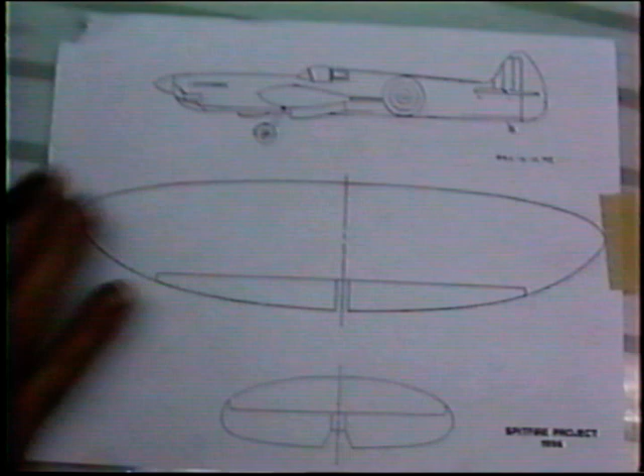Well, actually, no matter what model you're making, it's always a good idea to start off with these little shrunk-down 3 views here. Joe, of course, made these. In fact, I think he even has the revised ones. Okay, so what Joe and I have both done in the past is make up several sketches of tentative paint jobs. But what we also want to do is take out a sheet of paper and put together a schedule.

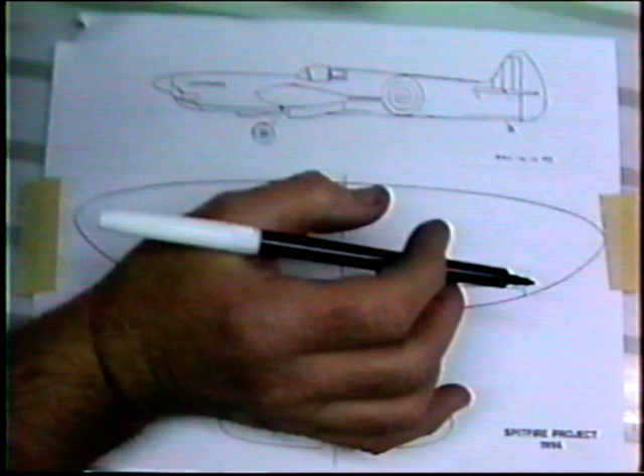Now the purpose of a schedule, and I'll keep this off camera, is you go through a little mock-up of the paint job. And it doesn't matter if this is a Cardinal or who knows what. I would say you always want to start with the lightest colors first. In this case, we know the invasion stripes are going to be black and white, and I'm just going to sketch these in tentatively here. So I have a white one, this would be a black one. This is not to make a pretty picture, this is just to go through the scheduling.

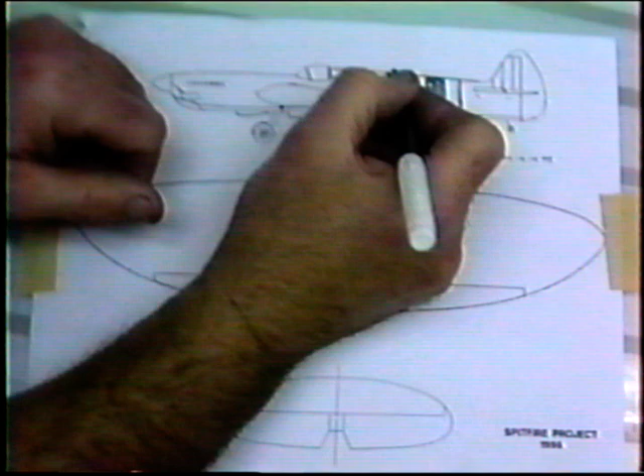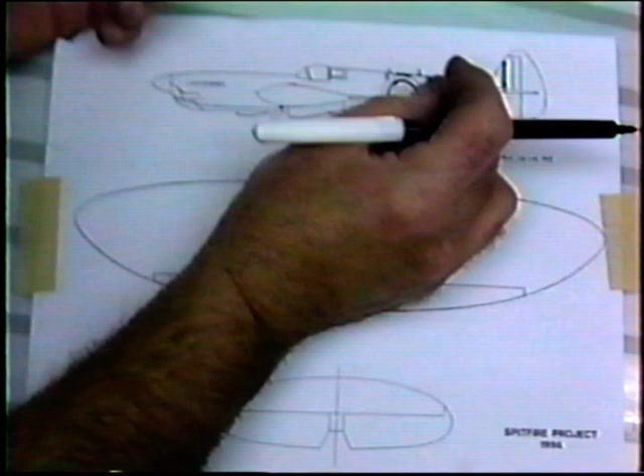Now the white, I would have this white, and this white, and this part of the roundel would be white. So I also would have a bar back here of white. It's always easiest to do the lightest color first. You wouldn't want to paint the black stripe and paint the white on top. And I really wouldn't want to backmask for that amount of distance. We're only going to have 1 or maybe 1.5 of the invasion stripes black, so it almost doesn't pay to backmask it. So step 1, and I'll bring out the little schedule, is the white bands.

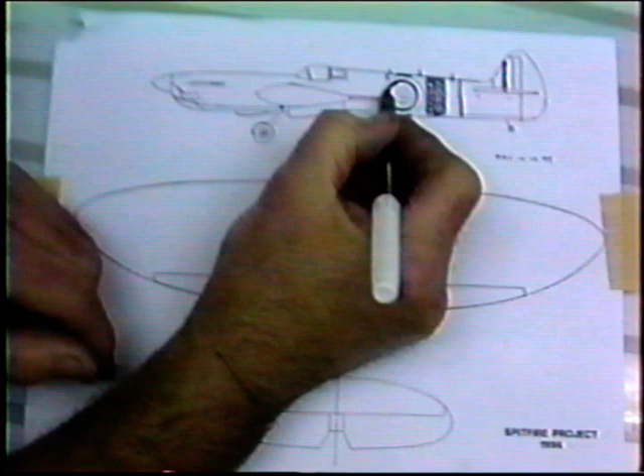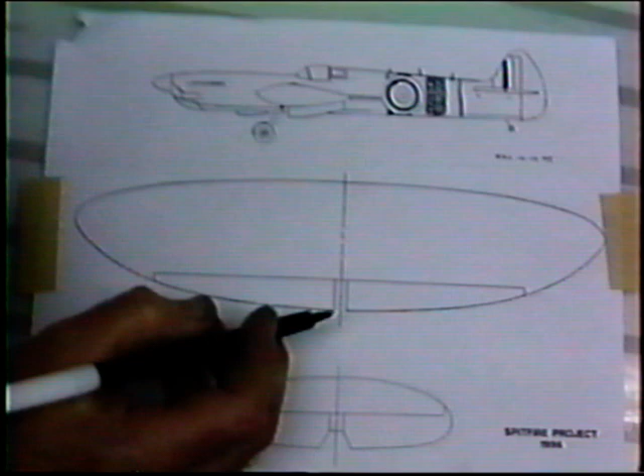Now in this case, the white bands also let me pick this up at the same time. So when I mask this off, I'll really be masking the roundel and that stripe all in one shot. I'll also have to backmask or mask this little stripe here. So again, once I have white in the gun, I'd like to paint the white, and because it's the lightest color, I'd like to get that done first. Now I also have to lay out, with patterns, a barber pole here: white, black, white, black.

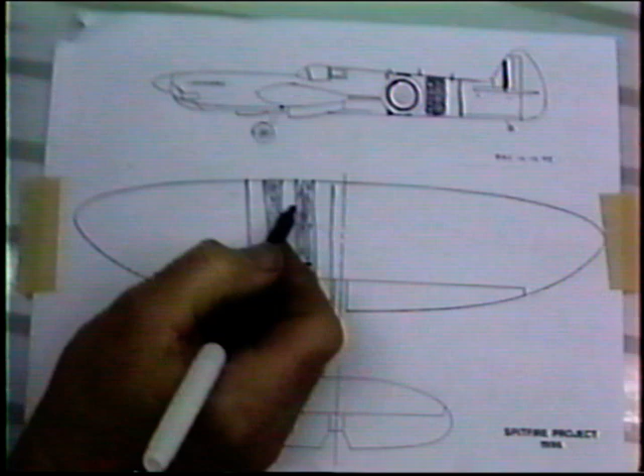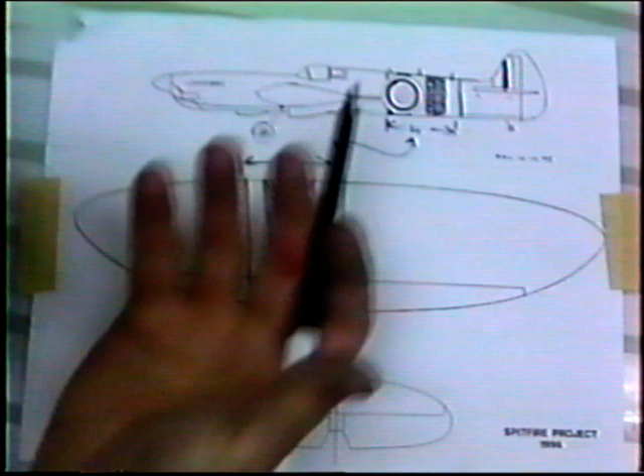Okay, the invasion stripes. Right from the onset I knew I wanted invasion stripes. So looking at this I can see I want to paint this whole band white. So I'll paint this band and this band white. Now there's a couple of things for figuring this out. If I was to paint the whole plane the camouflage color and then paint this white and then black, I'm going to have paint on top of paint on top of paint. I'm really struggling to keep the finish as light as possible. These bands are probably the one exception to the rule. The one part of the plane that will have more than one coat of paint is going to be the black in the invasion stripes.

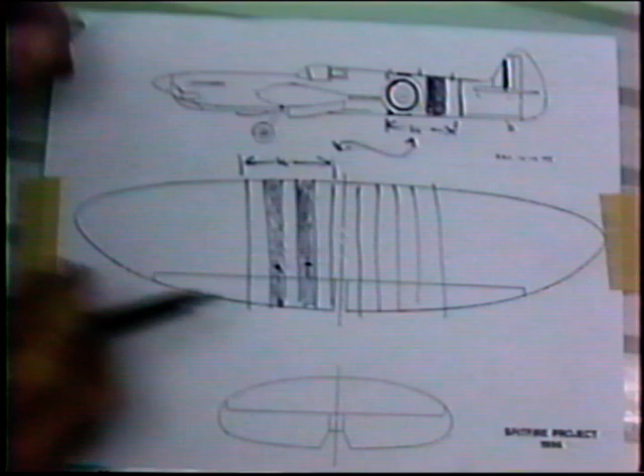But anyway, these will be on the bottom too. So there's no point in even fooling around here. If I know ahead of time, I have a band, and a band, and a little piece to paint. And of course the radiators, wherever they wind up being on the bottom. The point is, figure out what you want to do first. So the first thing in the schedule is the white bands. That's going to be the first thing we do when we actually go to the plane: get the white bands painted.

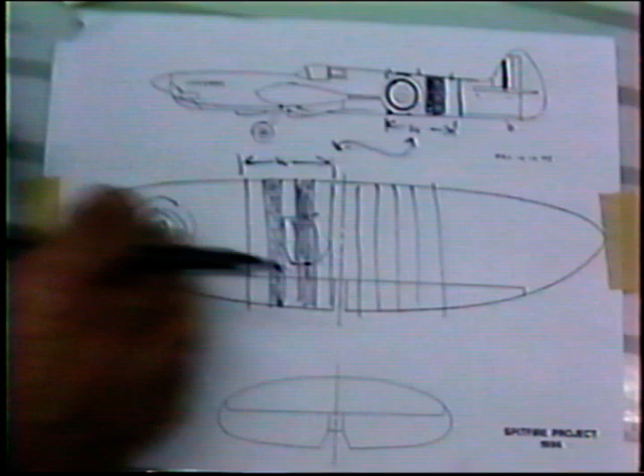We're going to mask off the white bands, estimate how far out they go. On the bottom, I've got to check this out, the roundels on the bottom have a white spot. We'll have to see if we're going to try to backmask that at the same time. But again, if we do it up here, the object is the colors. I want to paint the white first, if possible. That also lets me bring the white over the silver, which gives the best coverage.

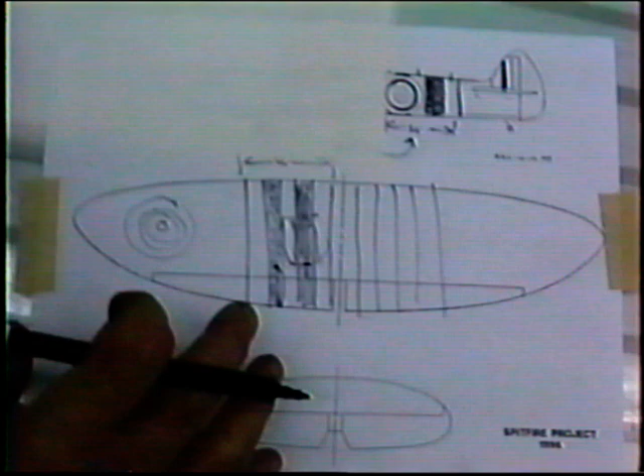So the second thing on my schedule is the black bands. That should cover real easy, the black will be the second color. Now the idea of doing this is to take a little dry run through the paint job and see. Because you never know when you're all finished, oh geez, if I just would have backmasked that, I could have done that, I could have done this. It's always easy to pretend you're painting a plane. Go through a little dry run on this.

I've done this so many times with Cardinals, and I know Midgley has done it, and I know Adamusco's done it. Figure this all out ahead of time. Walt Russell in Washington used to be real good at making up little sketches of his paint job before he ever went out and did it.

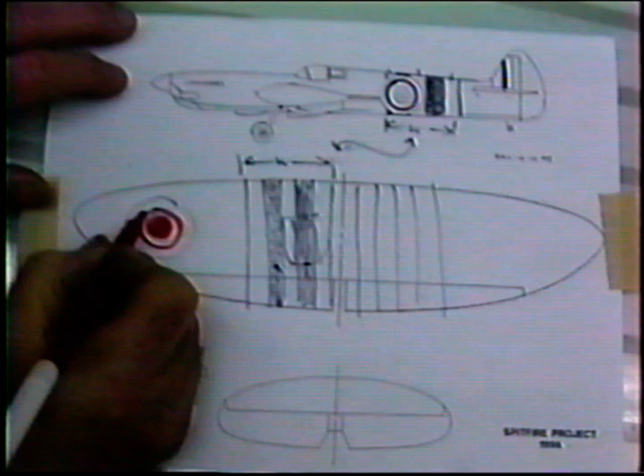Now what we may want to do, on the bottom roundels, the center is red. I may want to make the red, and I don't know this yet, I'm still doing my dry run. On the top they're red and blue, but on the bottom there's a band of white. So what I may want to do is paint this whole circle white, and then just paint the red on top of it. Again, I'm going to think about this. I know I need a little red up here. If I remember right, the red is on. I'll have to check the colors. Believe me, what I'm doing is just trying to make a little dry run here.

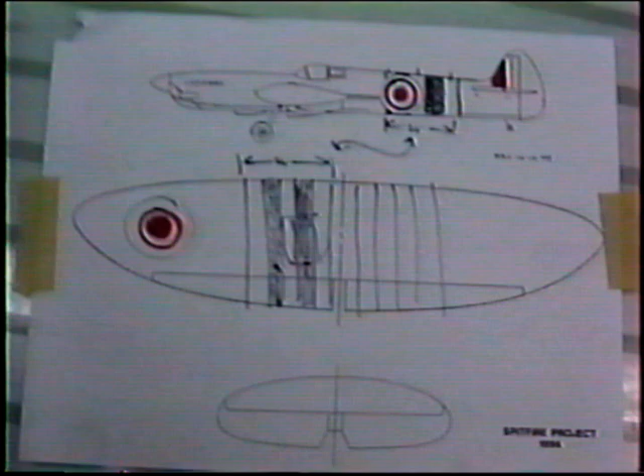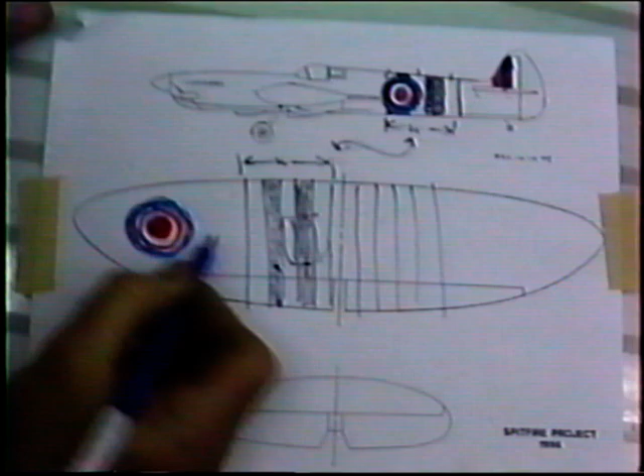Now I know the next logical step would be the blue on the rudder. Again, a sloppy drawing. There'll be blue on the outside of this roundel. This is not done correctly, I know, don't holler at me. Again, this is just a dry run, and this would be blue. Top roundels wouldn't have the white. So by envisioning this and by looking at it, okay, that looks like the next thing I'd want to schedule in would be the blue. And of course, this isn't something you have to stick to like the Bible. This is just a dry run through to see how you really want to do this.

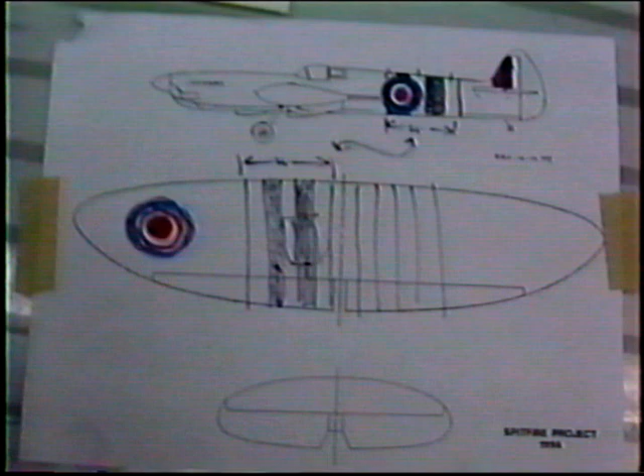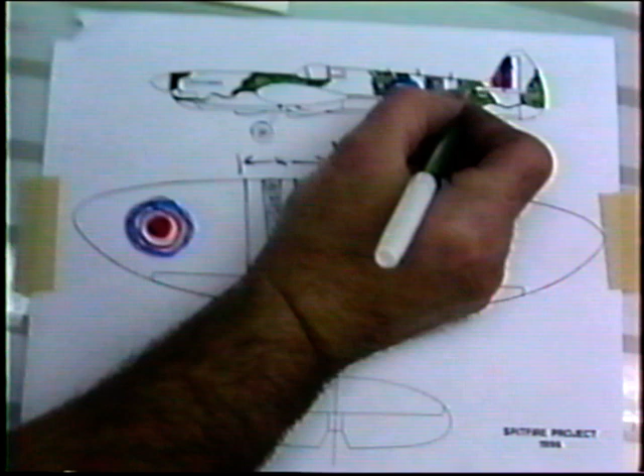Okay, we have several colors of camouflage, and we may be fine-tuning those colors as we go along, but just to simulate this, we would want to get one of the camouflage colors on. And again, the choices are, we could airbrush the edges, that would save a lot of backmasking, or we can do hard edges. I've seen Spitfire pictures with the edges both ways, airbrushed like a blended edge or a rough edge. I've also seen so many different colors of camo that it's ridiculous. In the case we have, I have a light gray-green and a dark olive drabby green.

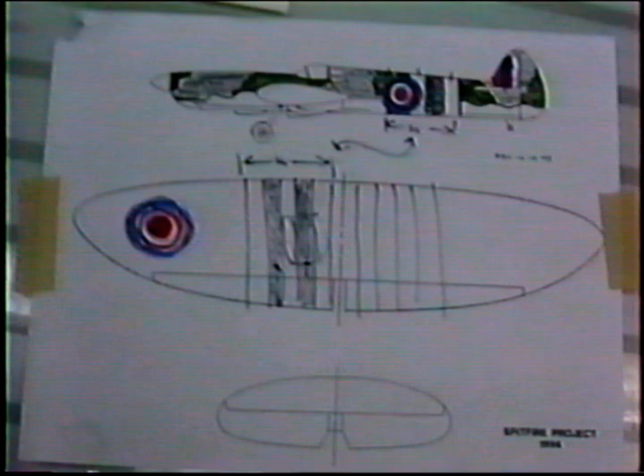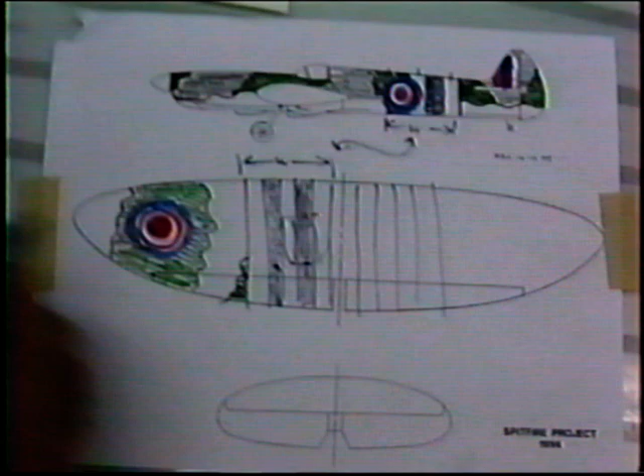But just to simulate this out, let's pretend we wanted to do this. Okay, and then the same thing out on the wing. And of course we'll make this a lot fancier when it actually comes down to it. But it's a lot easier to sketch this stuff out. It's not only useful for coming up with what you think is going to be a real good paint job, like Dave likes these real exotic paint jobs. What it's good for too is to lay out the sequencing. Sequence out the whole thing ahead of time, just to get a rough idea. Now, if I was to do that, I would just put here camo.

Now the color blue, we still have two choices. We still might go with the target tow, which is a yellow bottom. Again, this is just to lay this out. So I could then put in here, instead of camo, bottom, since I don't know if I'm going to be doing a yellow bottom or a light blue bottom.

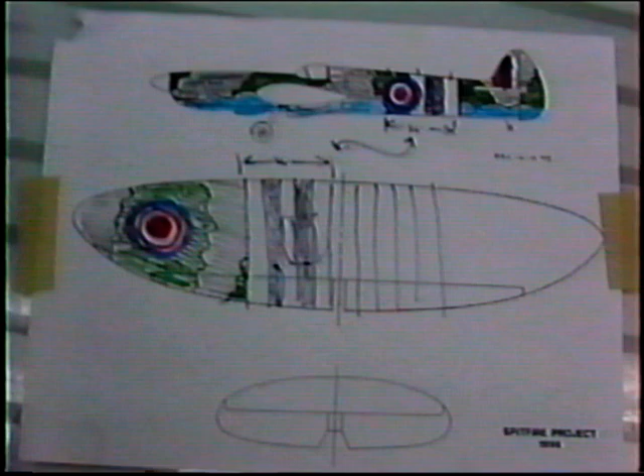That gives you a rough idea of just how I would lay out the paint job and what I would come up with for what I hope would be one way of laying this paint job out in a rational, simplified way. And believe me, when this is done, this is going to be an exotic paint job. This is going to be just as much work as doing Strega or Tsunami or any of these straight line guys. But at least I'll have a starting point, and that starting point should be a big help.

Now, these are just some of the ideas that Joe's laid out for tentative paint jobs. This looks like the one he was working on, the Recon version, which is an all-blue version. The Navy one, which is, I assume, yellow and blue. And again, on and on. Now, I notice he just did some Letraset up here, too, to make it even more realistic. I think this is the one he affectionately calls How Now Brown Cow. Oh, no, this is the cow.

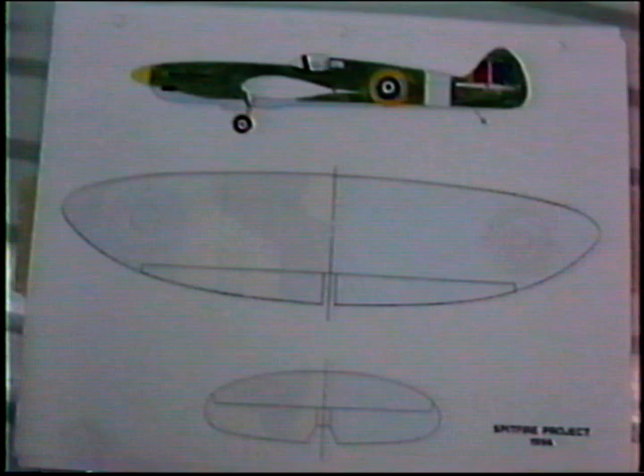But anyway, the point to all this, if you figure out ahead of time what you really want to do, it's like I was explaining to somebody the other day, if you're going to spend all this time and energy to do a project like this, another hour or two with the sketch pad is a really good investment. Don't cheat yourself. Don't go running off half-cocked.

Here's one that looks almost like it; the one thing I left out is the yellow on the roundels. That'll probably be the last thing. But again, the more you think about it, make up a plan, make up a schedule, you'll always be way ahead of the game.

I had a color paint that I actually bought. I used this photo here to purchase the paint, I think, but when I look in the can, this is a little bit darker. So again, final blending. I'm just looking for the color relationship here. The green and brown, the green and gray.

The green and brown was what they originally used, if I have my history correct. In the beginning of the war, they were camoing them brown and green because they were basically over land. And as the war went on, they were camoing them more of a gray-blue and a green because they were camoed to be over water.

Now, I've been looking at some of it, and there are so many varieties of roundels. You can see the ones on the wing here. There's no yellow in the middle of them. These roundels, the fuselage ones, have yellow. Some of these, this is for the Royal Navy. Again, I'm trying to do my homework here, figure out just what the roundels should look like.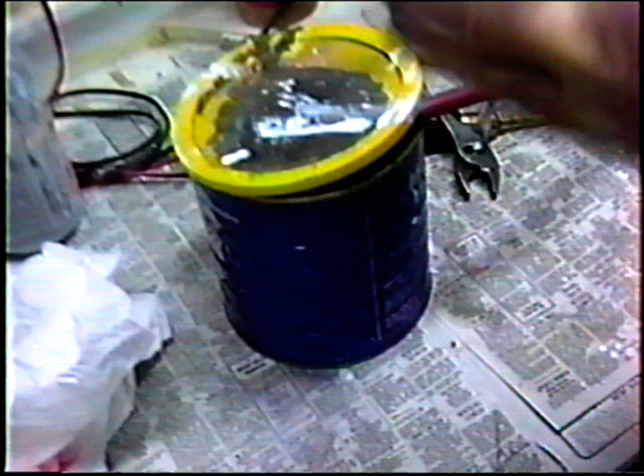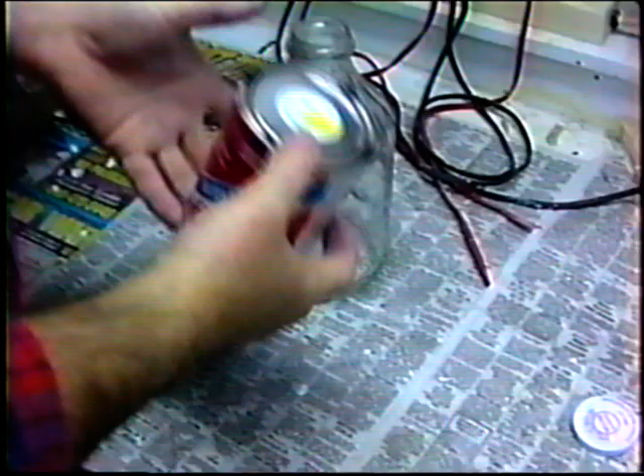Now, one other thing I'm going to try to do here, I have a can of Sig White. Now you have a lot of choices here. You can use Sig Clear Lite Coat. By the way, all Sig colored paint is made from Lite Coat. This is a misnomer on here. It's made from Lite Coat. You have two choices. You can put Sig Lite Coat in a jar and add white pigment, or you can, in this case, I bought Sig White. It already has some pigment in it, and I'll add some pigment to it.

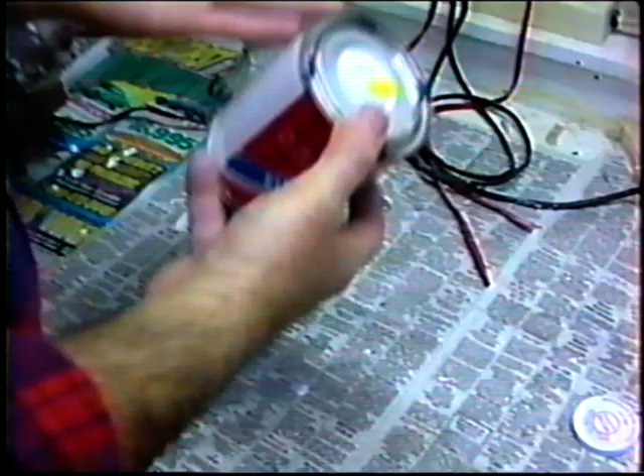Now the question is always, white especially and yellow, how much pigment do you add? Well, depending on what you're going to cover, it would vary. Since we're going to be covering something that's already silver, the idea is we really won't need a whole lot of extra pigment. We'll probably put 4 ounces into a can like this. This is 16, I believe. I just want to double check. Yeah, because they always downsize this stuff to begin with. 16, so that would mean 25% extra is going to be pigment. Okay? So it gives you a rough idea.

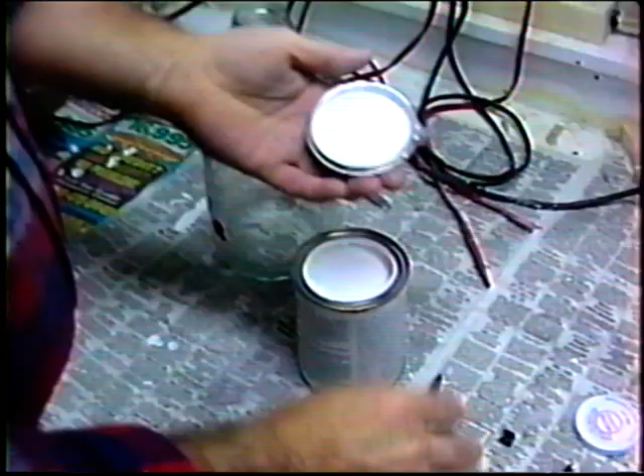Now I noticed some of those cans of pigment that I bought, there's like 60% pigment in the light blue. It's really a lot. I ought to go look at the numbers so I have some accurate numbers. But anyway, I do this by feel. White, yellow, you add the extra pigment. There's no secret to doing this. Pretty much all of the top flyers that I know of have tried this and used it successfully. The only mistake you can make is to add way too much pigment. If you happen to just go and add 70% pigment, the paint is not going to stick well and it's going to dry looking like sandpaper. Well, you're not going to get that good adhesion.

This would be the minimum amount of thinner that you'd need. We're probably going to add a little more. Stir it up because you know that pigment's down at the bottom. Now Sig is especially cheap with the pigment. If you don't add pigment, you wind up putting 50 coats of white on. And in the past, many people have ruined a good stunt ship just by not putting enough pigment in the paint. White is the hardest color to cover, that's for sure. I put the lid back on the can. And I won't repeat this over and over, but for the white, this is an important concept.

Another concept, you always want to paint the light colors first. I might have mentioned this when I was putting the other little dissertation on the video. You really don't want to go ahead, paint a plane black, red, blue, and then try to paint white over it. You'll die. You'll need 1,000 coats. So I know this might be a little boring to sit through, but I think the majority of the people that have gotten good information from the tape, this is the kind of information they need. Once you've gone through this once, you will never go back to just using ordinary paint.

I'm only going to go through this once. I want to have all my paint mixed, so I probably today will not get enough time to get started on a paint job. But, look at this, half's going on the floor here. No wonder I have a newspaper down. Okay. Now you can see the bottom of the can is kind of empty. You're kind of finished with that. Now you have a mix that's 50-50.

Now, they tell you, if you ask, they tell you, oh yeah, there's fisheye killer and Flexol in the dope. Yeah? Well, what I do is I play it safe and make sure, because I never know from day to day what the hell is in this dope. I just put a shot of that in, no specific amount, a spoonful, 2 spoonfuls. And this is the fisheye killer. 1 drop of fisheye killer in the whole mix. Now that's ready to go. That's absolutely ready. It's going to be on the thick side now, but we haven't added the pigment yet.

Get this mixed up first. The whole key to getting good coverage on white or yellow is get the mixture right. The mixture right and a clean gun, and you'll laugh. You'll say, so easy, it's unbelievable. If you don't get it right, it's a nightmare trying to paint something white.

Now you can see, let me look at this on the macro. Just by looking at this cap, you can see how pissy thin this is. Christ, there's no coverage there. It's terrible. If you were to try to paint with this, and this is 50-50, this is a little thicker than I normally like to paint. If you were to paint with this, you're looking at 6-8 coats of white, and it'll still be gray. It won't even be white.

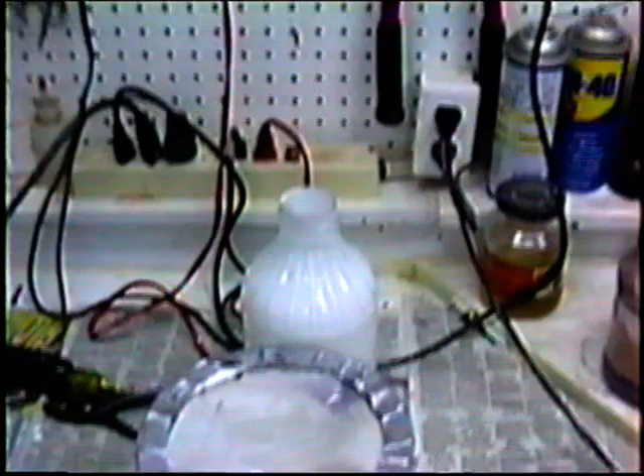So first thing I'll do is fill up one 4-ounce jar, add that 4-ounce jar in there, and that'll hopefully get me in the ballpark. I know I'm going to be a little thick. I'll be adding a little thinner. If it's humid, a little retarder. But that's a ballpark number that I know I'm going to be close on my first shot when I put it into the gun.

Now, I always shake the hell out of this stuff. Just like paint, some of it settles to the bottom. Now, I've made a couple of mistakes in my life. If you happen to want to buy a gallon of this stuff, be my guest. It's a lot of fun. I found out that once you take the lid off these cans, they never really seal the way they should. So what I do is poke 2 screwdriver holes in a gallon can and use duct tape to seal them, and that seems to work the best of any way I've tried. If you have any gallon cans, that's a good way to do it. I want to add roughly 4 ounces, so I'm really just using this as a measuring cup. And this is just raw white pigment.

Now here's the key thing. There is no set amount. There's no such thing as, well, you just put this and this together and it works for everybody. Depending on the temperature, the humidity, the pressure you spray at, or if you're trying to go over dark colors, you might want to add 2 jars to a mix like this. I'm going to start with just 1 jar, and if I have to, I'll add a little more, but I'll be very cautious. I would like this to cover. Remember, I'm trying to keep the weight down. The idea is I don't want to put a quart of white on here to get 5 invasion stripes. And the more of the plane that's white, the more of a saving there is by doing this.

I always want to keep that vent hole toward the back, so when I do the final tightening, I don't want to be going like this and have the paint drip out. Vent hole to the back, then tighten up all the bolts. All of the screws on here. Okay, the tip is the last thing that goes on.

Now what I can do just to make positively sure is I'll take a little bit of thinner, maybe 2 ounces of thinner, run it through the gun, make sure the vent hole is open. I take 1 drop of WD-40, 1 drop, don't spray the gun. Put it right on the shaft, work the shaft in a few times, and this gun is ready to do another paint job. I should be ready. I'll just put the paint in and we'll be ready to run a test.

And I hope this information, even if you only pick up 1 tip off of watching a whole 2-hour tape, it's worth it. It saves you time and energy in the long run. It makes you have fun instead of frustration.

And of course, as you're spraying thinner, work all your adjustments in and out. I start with them out 1.5. This one down all the way, but just so the thinner runs through the whole gun.

Now I would suspect, just a gut feeling, I looked at the radio this morning and it's about 18 degrees outside, and I know that paint this thick at 18 degrees probably is going to be too thick, so I'm prepared to add a little thinner if I have to. Just by looking at it, it even looks too thick. You can usually tell by the bubble pattern when it's about right. If it foams on the top, it usually is just about right. Looks like beer with foam.

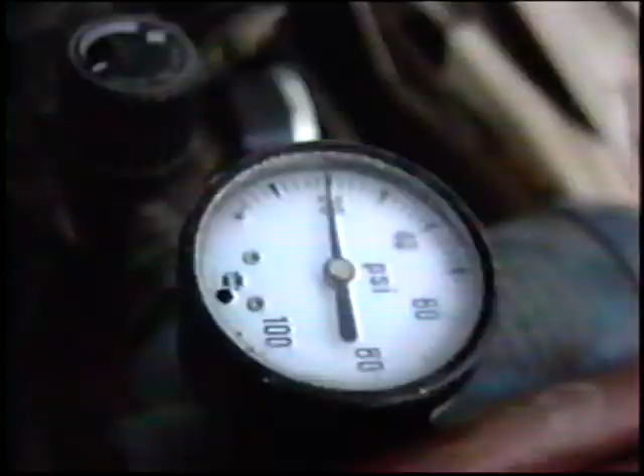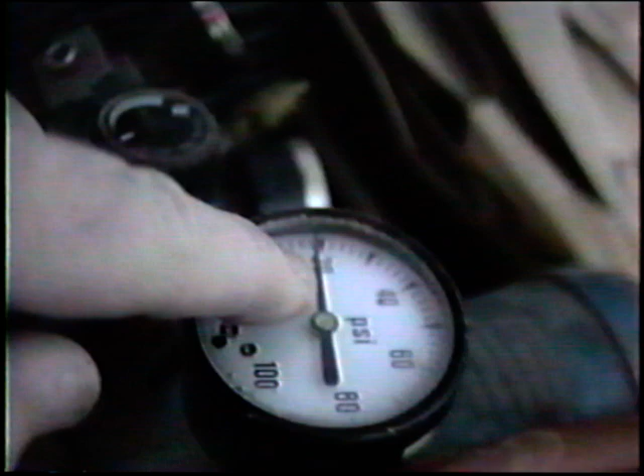There's one final thing here: when I'm done with any test like this, I like to mark on a jar or memorize how many PSI I was spraying with. Now because the temperature varies so much here, this is really irrelevant by quite a bit. I was around 20 when I was painting this, and I try to get it down even lower than 20 if I can. The reason for that is the less pressure I have, the less overspray there'll be. You don't blow paint all over the place.

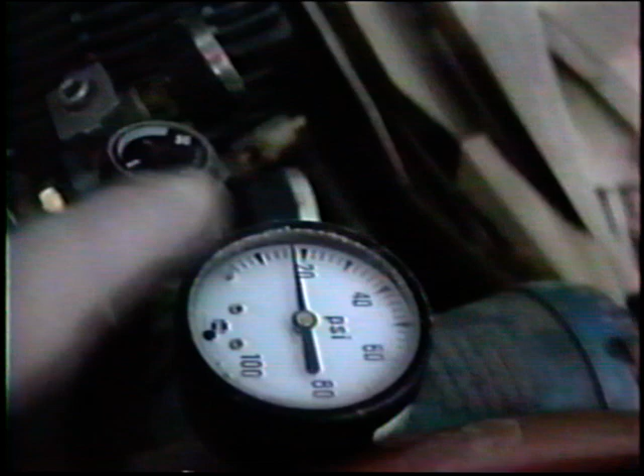But if I want to spray with a little less pressure, I can add some thinner, reduce the pressure, and I'll probably have a real nice fine spray. It'll really be nice.

Now this really dried up nice. There's a couple little indicators that tell you how your spray technique is. Now usually up here, you should have a little bit of overspray, roughness right back here. What happens is the paint is coming down and ricocheting off, and when you spray this way, it's ricocheting off. So usually right in here, it'll be kind of rough. Same thing on the stab.

Now I want to show this back here. Let me get this on a macro lens. You'll see it's just a little rough. In fact, I don't know if I can even show this on the macro lens. It's just right there. Just a little on the rough side, but that's out here. Smooth as can be, real nice. Tells me I'm ready for the paint.

There's only one little step I want to do. I want to get that little scoop that goes on the bottom, and I may have time to finish this off. I want to make sure the paint on it is reasonable, and then build that fillet around and retouch the silver. So that might be all I have time for here today. I don't know.

Just one final thing I like to do. This is that part that we painted white. I like to see what kind of adhesion I'm getting. That looks good. Even out by the overspray. So if you can do that with brand new tape, you know you can do it with the thin tape. You know the adhesion is good. You've got a good mix there.

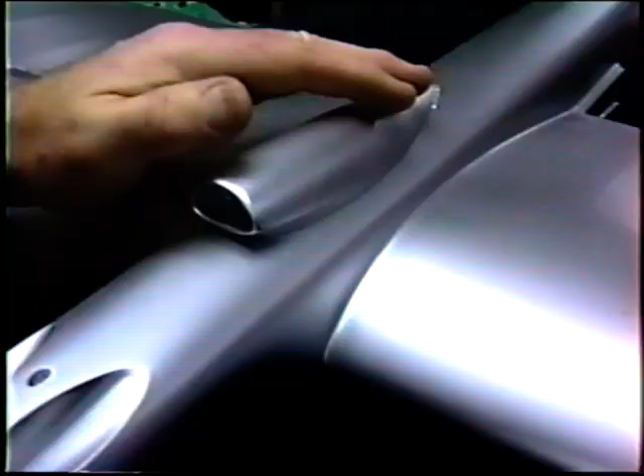And with that carefully in position, I got a Q-tip with just a little bit of alcohol. I'm twisting it as I go, then take the dry side. It's just a minimum in there. Actually the fit is so tight I don't even need tape to hold this on. I'll just babysit this until the epoxy kicks off. And then I'll run some thick CA down under there to make what I hope will be a real nice fillet.

One of the things I need to make sure is that it's right in the middle, of course, and that I don't have any way that oil can work its way in there.

Get the last little bit out of there. That should make just a perfect joint. Really nice. Oh, I'm babysitting this anyway. There's still a couple of dry spots on here. Just put a little CA because I'm going to get this all painted in.

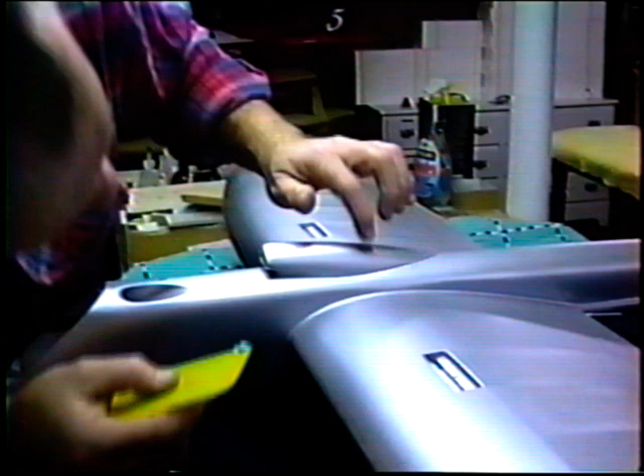There's also, while I was putting this up here, I gouged it with my finger. I can fix that gouge since I'm going to re-silver it. Just let that sit. It's drying up nice. I don't even need pins in it.

Now here's a tip, and I know you can use this. This is the kind of thing Alan Beers would be proud of. Well, I've been using little amounts of this stuff, just taking off little spoonfuls. What you have to do at some point in time, imagine this tube, you could do 10,000 airplanes with one tube, is do this. Get a whole bunch of it out, and it clears the nozzle, and you don't get any little rough spots or dry spots in there. Kind of clean that nozzle out, and just shit can this, so you're dealing with some fresh material there.

And get the tip back on tight. Now another great trick, I haven't had to resort to doing this, but I used to, is get one of those airtight sandwich bags, because this lid never really seals, and put this in an airtight sandwich bag. It'll even keep it fresher for a long time if you have to store it, especially over the summer. This stuff is just magic, though. It's unbelievable how good this works.

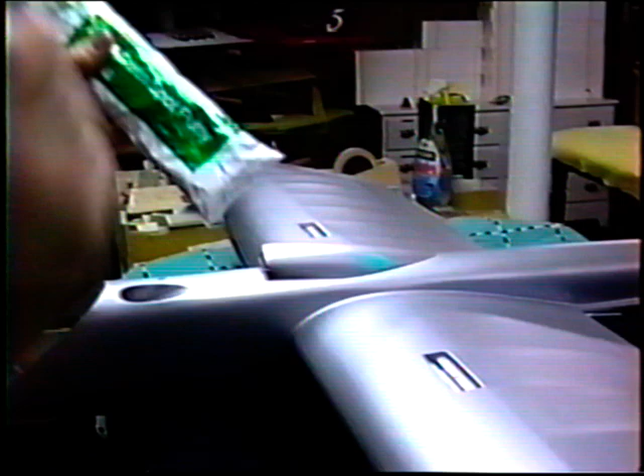It's just an easy way of doing it to get this on at the last minute like this. Just like you have the rudder separate and a lot of these other pieces. Just an easier way of doing this. And even though I've wiped it with Q-tips, it still has a little tiny bit of epoxy there. That's babysitting right on there.

Now the fit on this scoop is so tight and so neat. I don't even think I'm going to put a fillet in there. I'm just going to paint right. I'm going to sand this down a little bit because there's a couple of dry spots and there's one on the other side. And I'm just going to paint right over it. I think that it'll be overkill to put a fillet in there.

Now the plan is, before I lay out the paint jobs, the roundels, and all the other things, I want to clean all the paint off of the horns and lay the flaps, elevators, and rudder in position so I can start to get a look at what this is going to look like in a mocked up state. I don't want to have it that I'm laying out invasion stripes and I haven't taken into account the look of the flaps or where the roundels are going to go.

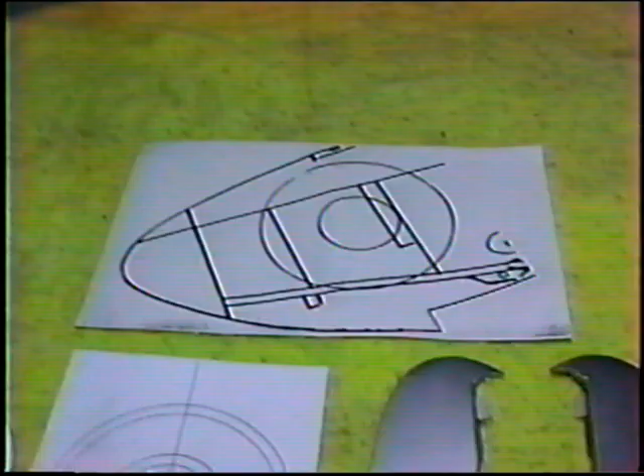Again, Joe has these roundels, and he made me up, I'm going to show you, some Xerox copies of the roundels. I have those knives from Ed Galler. I'm going to do a lot of playing in the next day or so, try to figure out exactly what I want to do in terms of the roundels. But most important of all, I guess, is that I've gotten to this point. The silver is in pretty nice shape. There may or may not be a couple other little touch-up spots.

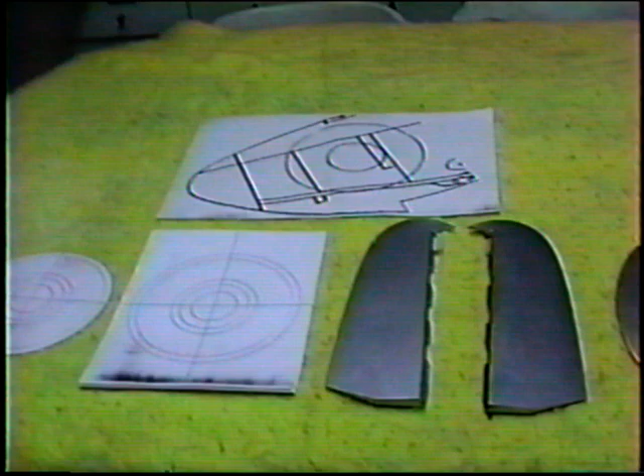One thing I hate about, I mentioned this, don't let yourself get crazy. When the thing is in silver, you get all this silver dust. I don't know what it is. It always looks dirty. But as soon as you paint it, it really doesn't. It really is bullshit until you paint it, and then it looks perfect. Anyway, I'm at a point here where I'm going to pack it in for the night and maybe get some work done with these roundels. I don't know. Got dreaming to do.

Today I finished up these bookshelves. I think you saw these on a previous video. Hey, there's that nice angel. Anyway, Spitfire books, Spitfires. This was a nice little project, and now I got all my stuff in order.

Now I just noticed one thing here. I had touched this up the other day and hung it up by this heating vent. Well, I've shown this already, but having the heat up in the house, it may ultimately be to my advantage that we had such a terrible winter, because this paint is drying up neater, harder, and nicer than any paint I've ever had. I don't know what it is. Maybe it's just that the heat dries it out real nice. I don't know, but this is really drying up beautifully.

Jesus, I cry over everything. Well, this is worth crying over. Look at it, baby. Nice, it's holding you. This is Lena, baby Lena, the youngest pilot to enter this year's Nats. Lena Borelli. The youngest Borelli ever to enter the Nats. Comfortable shoes. We're here at the Borelli factory of airplanes, and instead of making a plane this year, oh yeah, he didn't stop making a plane.

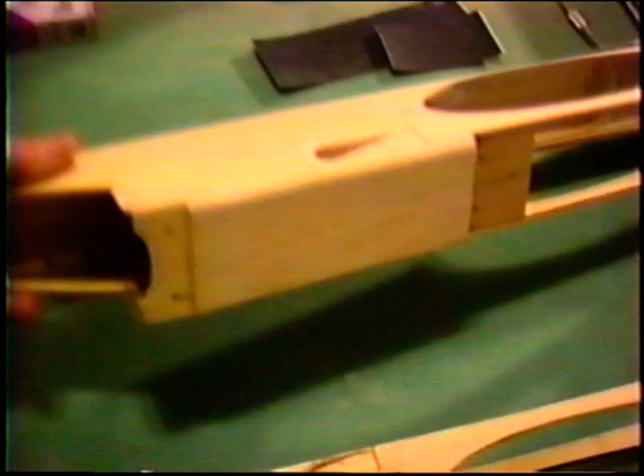And these, we've changed most of the wood from the kit. Yeah. And these you got fuselages, nice outlets. Turn this one over so I can see this one. Oh, you got the Strager kind of outlet. Strager outlet. Ooh, that's like the Cardinal, nice cowl, I like that shape. Like the Cardinal cowl. Beautiful. You know, the Big Jim nose construction. Oh yeah, nothing beats that Big Jim nose. I don't care what anybody says. I just read in Stunt News how you don't need heavy-duty nose construction. I think I'm gonna just rip mine right out.

I think I'll just get a saw and cut it all right out. And this is the tuner that you've been working on. Yeah. Now this, Jimmy, tell them the story. I already heard this story, but let's see if you can see this on the macro lens here. Right. It really is a full finish. It's a complete suit, dope finish. And I wanted to do it light. I wanted to learn how to do it light. So I took the plane, I built it, and that's kind of a little test bed to do finishing stuff on.

Little test bed. The finish with the clear on it came out to 4 ounces. And this is a legit 4 ounce, this is not a bullshit 4 ounce finish, this is a real 4 ounce finish. Yeah. Well, you got an awful lot of people that tell you it's 4 ounce, and you pick the plane up, it feels like it's glued to the floor. And this is the old Misty here, the one we fixed the fillet on? Yeah. Stripped down? All stripped down. Yeah, that kind of Cobra rudder. Right. That'll be a miracle plane when you get 10 ounces off of that. Yeah. That'll be one of those, why didn't I do this originally jobs?

Let me ask you something. Because actually what I wanted to do is strip it down, even take the paper off. You can take the paper off. Well, what do you recommend? Sure, we'll do some right now. I'll show you how to get it right off. No problem at all. I've gotten some off here. We'll do the bottom of the tail. Wait till Joey gets in. Use it for a little demo. Okay, sounds great. I'll show you how I got mine off anyway. Because I can sand some of the wood here. Underneath all that paint was a beautiful, that's like the Richie Tower thing. Richie had that 24 ounce plane, beautiful plane, and he went home and painted it, and turned it into a lamp, you know. It was heavy. This is nice.

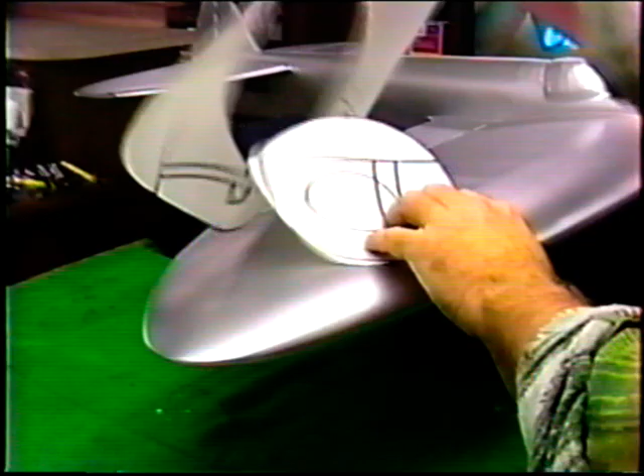I can put that right in position, take this out. Then when I go to do the other wing, it'll be in exactly the right position. And I can evaluate this, look at this, and say, gee, do I like that? Yeah, is it big enough, small enough, whatever. But this does look about right.

Now, by taking a book, what I'm trying to envision, and I'm not putting it in position, I want to see that the red part relative to the blue part is roughly the right size. Relative to how this is, Joe has made these templates, they look real accurate, in fact, look real nice. So I guess I can go ahead and cut this out of the blue and red paper. Now you can see I'm using Joe's actual pattern here.

Okay, now one of the things, I have that compass that Ed Gallagher sent, and I'm going to fool with that later and try to figure out what is the easiest way to do it. Ed sent a note with some tips and things.

And, you know, I really appreciate when people take the time and the energy to share this project with us. I probably have said that enough times that you're sick of hearing it, but it really adds a nice dimension to it. It's certainly a lot nicer than working on something, knowing that nobody else in the world really cares about how it's coming out. I think we're kind of sharing a neat thing here that's evolving, and especially so many people that have sent stuff in. It's been fun just reading the literature.

Now, the idea of having this stuff is we're not making a scale model. If this was a scale model, this would be so easy. You just do this, make the pattern, photo enlarge it, boom, that's what it would be. But we're looking for the illusion. I want the illusion. This is not a scale wing. The illusion that it's a Spitfire.

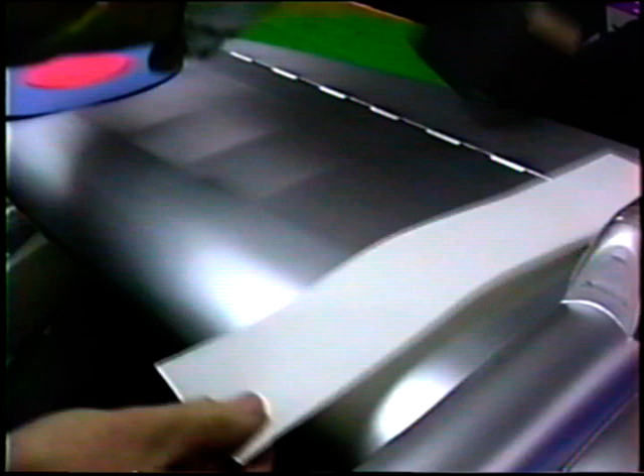Now with the stripped down pieces, each time I lay this out, I can reference back to the book or whatever picture. Or even if you were doing a normal airplane, you can be manipulating the trim to get that look that's in your mind's eye without having to go back and do the paint work over and over. It's a lot easier to do this than it is to go repainting and sanding, and many times I've done it and said, gee, why didn't I lay it all out? Because what was done wasn't what I had in mind.

Now I can take the picture, hold the picture right up to it. That looks real close. Now the thing I'm looking at here, it looks like it's exactly or just a little less than half of the span, and the roundel is almost over there touching, and there's quite a bit of tip showing. So let me see what I have.

If I stand back and I look at the picture, actually it looks like they're still a little bit too big. I'm going to take another 1/8 of an inch off of them, and then if I've gone too far, I can just add an 1/8 inch back. I'll make a new set of stripes, but it's kind of a redundant thing from this point on.

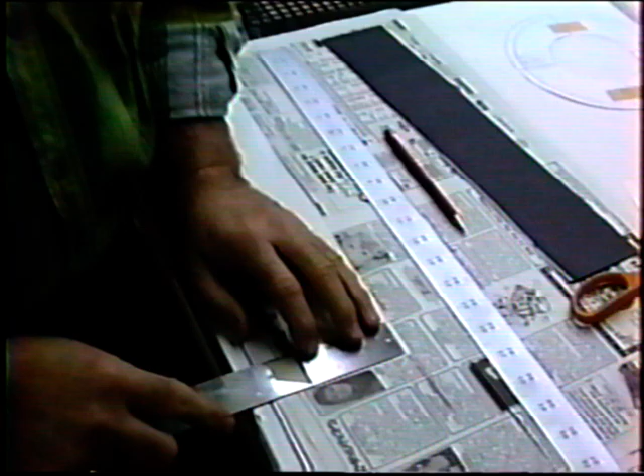Now I'm leaving that original tape line on there. This may seem like it's a little bit of an overkill thing, but for me it isn't. I like to get this perfect before I ever put a piece of tape down on a plane. I want to know what this is going to look like. I don't want to take one chance in 1,000 that I'm going to be unmasking this and redoing it, because I've already made that mistake. Once you make this mistake, it's like slamming your hand in a car door. It's the kind of thing you generally don't do more than once a lifetime.

And I have rushed out and taped out whole planes thinking, oh, hurry up. Yeah, I got to get this plane done. Spring is coming. And then been sorry as hell when I saw what the final product looked like, and wished I would have made up an hour or two of patterns.

You can do this, and I'm doing this on a day that obviously I'm not going to get a whole lot done today, but I can go back and forth. Then I can come back tomorrow or the next day or the next session and take a look at this again and see, how do I like that? Lay it on the ground, put it 70 feet away, put it on a table, I get a lot of choices this way before I ever have to commit, or ever even have to put a piece of tape on the airplane.

You know, at first glance you look at this and you may be thinking, oh, this is a simple paint job. You know, this is probably one of the most difficult paint jobs to get if you really want to get it right. You really have to go back and forth. You just can't slap on things without having that look. It takes 1/8 of an inch to change that look, and all of a sudden the thing is too wide or too thin or whatever.

Now what I'm going to do, I want to look at this from a lot of different angles. First of all, line them up. That looks real good. Now that's the look. There we are. Okay, now the only thing that's wrong is the roundel. With these stripes here, the roundel looks a little bit too small. So what I'm going to do is take the roundel off. I can save this roundel, of course, and I'll make one 1/8 of an inch bigger. I'll just add 1/8 of an inch all around this.

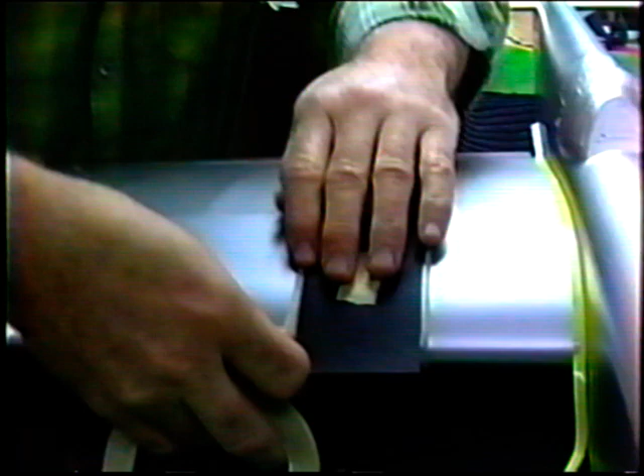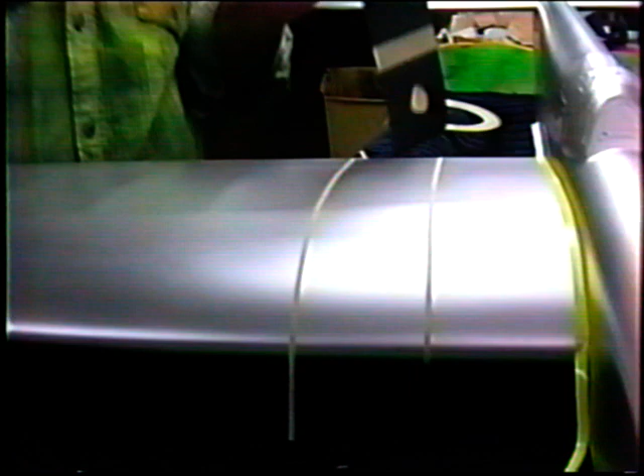Anyway, these are the little things that make it not only possible, practical, but accurate. And if you can pick up all these little tips, great. Now once I have that piece out, now I can measure, where the hell's my white stripe? Because I want these to be the same thickness, I can just verify that I haven't left out one step, and that this will be inside to inside when I backmask it.

Now remember, because this is a double wrap, it's not going to stay even on one side. You have to really do a little interpolation on this. I'm leaving the tape hanging off a little bit. Just leave it oversized up at the front. I can adjust all the tape at the front at one time.

Now this will be the next black stripe. The black stripe has the minus the tape, so we can just do a real close alignment on this. And what it does now, we can just bingo and grind out the stripes. We have the patterns made. We know this is all going to be parallel. And you could use the same technology if you were going to repeat some kind of a repeatable pattern, stars, bars, whatever.

Now I know the last one is. Once I get this one on, then I can flip it over and do the bottom. And I'll know the bottom is right because all the tapes will match, or they should match.